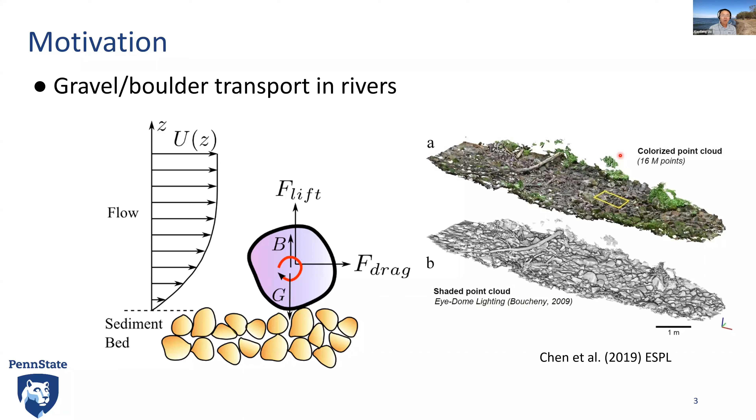In addition, when these gravel and boulders move, they interact with the bed too. If you know a little bit about sediment transport, one of the modes of sediment transport is called saltation. They just jump or hop for a short distance and go back to the bed. Because of the transport of these particles over time, the bed could change. You can have scour, erosion, so again this whole system evolves and changes status from time to time, especially during floods.

So from the perspective of engineering application, one prominent example is bridge foundation scour. If you build a bridge for roads or whatever transportation purpose, when these roads go across streams and rivers, they have to build something like a bridge to support the structure. So this foundation is built into sediment. So this foundation, or the whole bridge structure, is the object that people place into a stream, into the river.

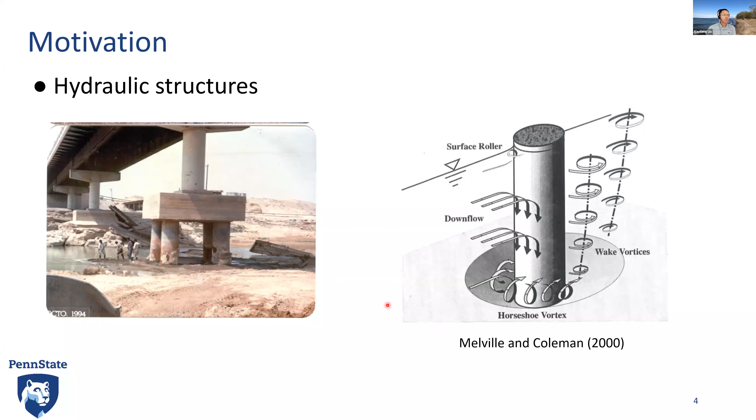So in this example, this is an extensively studied topic. People now understand what the flow field or the structure looks like when the flow comes in and meets this structure, and how the flow goes along the side of the structure. And in front of that, it can plunge down and create what we call a horseshoe vortex, which is the primary cause of sediment transport around these kinds of structures. And of course, that's the cause of bridge foundation scour.

The next example is in river restoration. This is an example where we have a project still ongoing to look at what we call large woody debris, or engineered log jams. The wood, for example these trees, this woody material, is everywhere in natural streams.

In nature. So they're part of the nature, or part of the system, right? But in the past couple of decades, people have done a lot of modifications to a lot of rivers and streams. Many years ago, we thought that the primary function of rivers and streams is to transport floods. So to make it more efficient. Well, how do you make it more efficient? Reduce the flow resistance. How do you reduce the flow resistance? Clear it up, make it clean and nice, and to make it better, just pave it with

concrete. But now we gradually realize that the river not only functions as a conduit for flood flow, but also has ecology, environmental values. For example, these are habitats for fish. So we're trying to restore many places in the United States and all over the globe. People are trying to restore the multiple functionalities of the rivers. One of the things we do here is to introduce large wood. Instead of clearing them out, now we reintroduce wood into the channels.

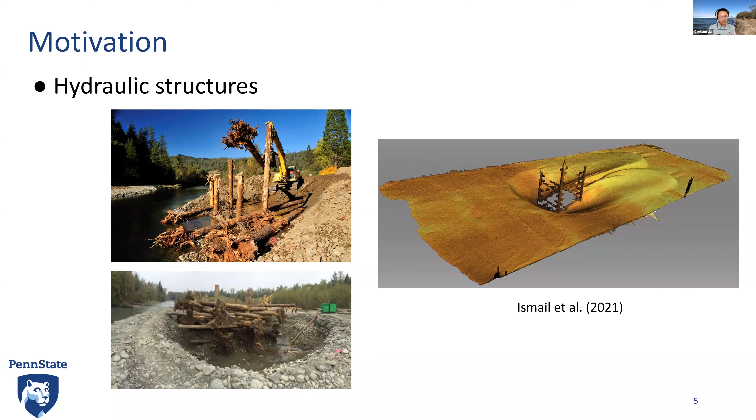But whether they can function well? For example, how are the flow dynamics going to look around these structures? How is the sediment transport going to look around these structures, and whether fish are going to like it or not? So these are open questions. Again, this is one example of a flow, structure, and sediment system.

Another example is coastal structures. In coastal areas, we have hurricanes, we have typhoons. And then we have infrastructures, we have houses, we have communities living in these areas. If you put these infrastructures there, it's definitely a flow, structure, and sediment system, because these foundations are built into the sediment. If you have a hurricane or typhoon, it might cause a lot of damage if the foundations are not designed properly.

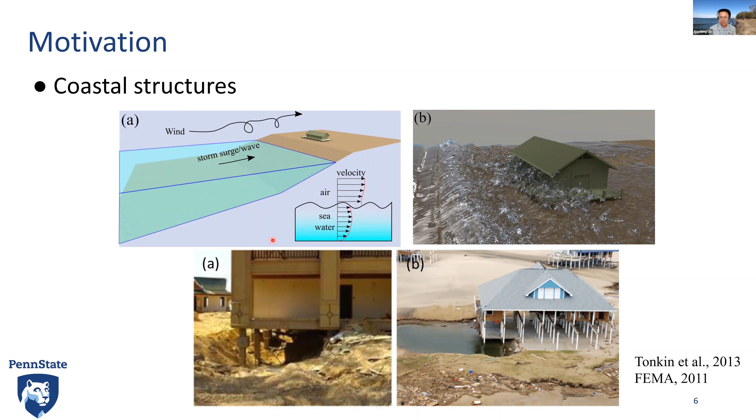As you can see on the bottom, there's some post-disaster survey. I think those are in Florida somewhere, after one of the hurricanes that happened recently. As you can see, it caused a lot of damage. So during the hurricane season, this is a big coupled system among flow, the coastal flow and waves, and the structure and the foundation sediment.

Like I said before, underwater pipelines and communication cables are pretty important for our daily life, our modern life. Scour around these pipelines and communication cables has also been studied extensively in the past several decades. But still, it's an example in this general category of flow, structure, and sediment, because these pipelines and cables are placed on top of the ocean bed. Sometimes they just place them there. Sometimes they have some kind of backfill or dig a little trench.

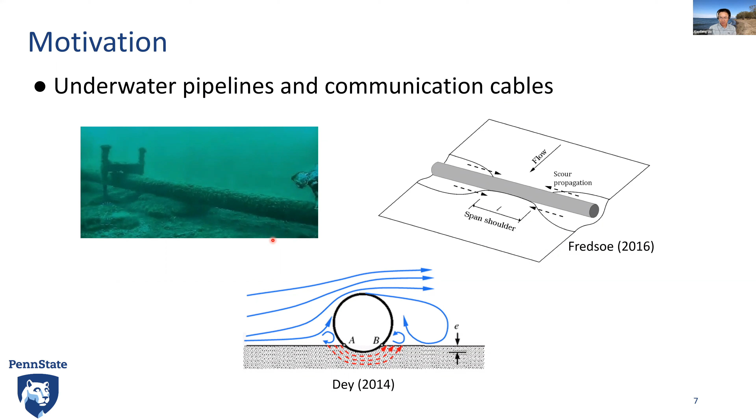But overall, it's a coupled system. We're interested in how the flow and sediment transport dynamics are going to look, whether these pipelines are going to fail or not, whether these cables are going to break or not.

So now go back to the underwater unexploded ordnance problem, which is the main purpose of the project that we're doing right now. Due to historical reasons, especially after World War I, World War II, and numerous other wars, there was a surplus of these munitions and bombs. At that time, people didn't know how to deal with them.

At that time, one obvious solution was just to dump them into the ocean. Their thinking was if you dump them far away off the shore, they will disappear. Well, believe it or not, after several decades, some of these things are being transported onto shore, as you can see in the picture on the left.

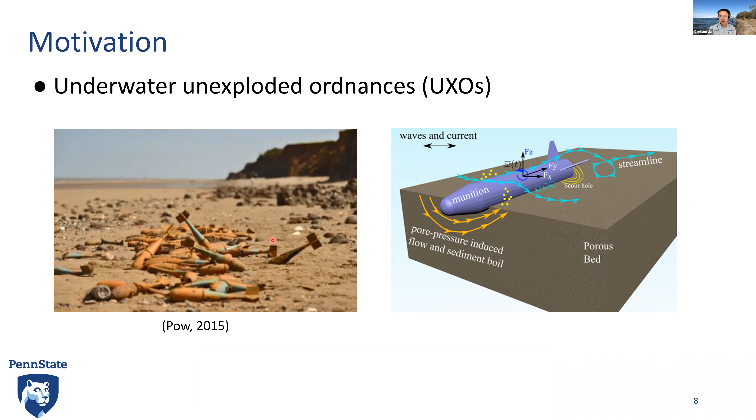So some of these things are being washed up to the shoreline, and sometimes kill people, right? And plus, it's an environmental hazard to the environmental quality. So one of the things they're interested in is the dynamics of these objects, right? As you can imagine, these objects are similar to gravels and boulders, and under the hydrodynamic forcing of waves and currents, they can be moved around, okay?

So now go back to the more general framework of these coupled systems. I want to show here a flume experiment video. This experiment was performed at the University of Illinois more than 10 years ago. What you see here is that initially there was a cylinder. It's made of steel, it's pretty heavy, placed on the bottom of sediment.

And then what you see is that they have this kind of oscillatory flow, the flow going back and forth, right? So as you see, with time, this object kind of moves and sinks down into the sediment. So we are very interested in how this is going to sink. Why does it move this way? This is only one scenario that we can simulate in the flume.

What people have observed in the field is that under certain conditions, for example a large wave or large storm event, not only can this thing sink, but sometimes it is scooped up, right? It kind of floats up and then is transported somewhere else. If you look at the whole process, it seems that this is an example of a flow, object, and sediment bed coupled system.

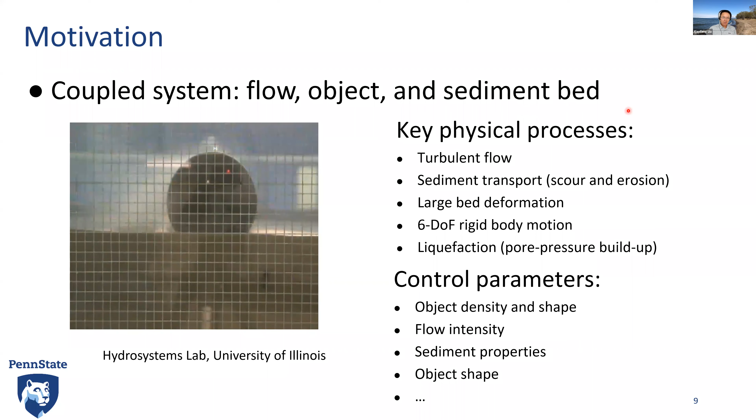And sediment property: when you have a very fine sand versus a gravel bed, the whole thing will be different. And then the object shape: if you have a cylinder or a sphere, all these things are going to be different.

So with those things in mind, how do we come up with a computer model to describe these processes? As you can see from my description, this is a very complicated process. It involves multiple phases, multiple things and multiple physics. So, if you have some familiarity with computer models, right?

Well, a computer model is nothing but a computer code that solves the governing equations, right? So what are the governing equations? The governing equations come from our understanding of the physical processes, right? So what are the physical processes? Well, I already described them a little bit in the previous slide. Mathematically, if you want to write down these physical processes, you have to write them into governing equations.

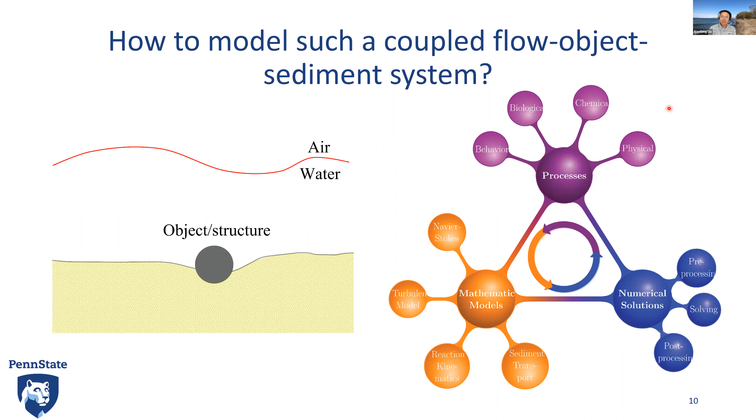Now, I'm not going to go into too much detail on the governing equations we use in these models. Essentially, it's nothing but conservation of mass, and then Newton's second law, or what we call the momentum equation, and some other physical laws, such as how much sediment is going to be moved under certain conditions, the sediment transport rate law, things of that nature. So don't be scared about these complicated computer models. Inside, what's implemented is nothing but those fundamental physical laws.

So as you can see, all these processes, more than 5, 6, or 7 physical processes, are happening at the same time. Those are the building blocks for us to come up with a more complicated model to describe these complicated phenomena. That's why I say building these computer models is like Lego. Each piece of the Lego is like one part of the model. Let's say this piece is for flow, that piece is for the sediment, and another piece is for the object itself.

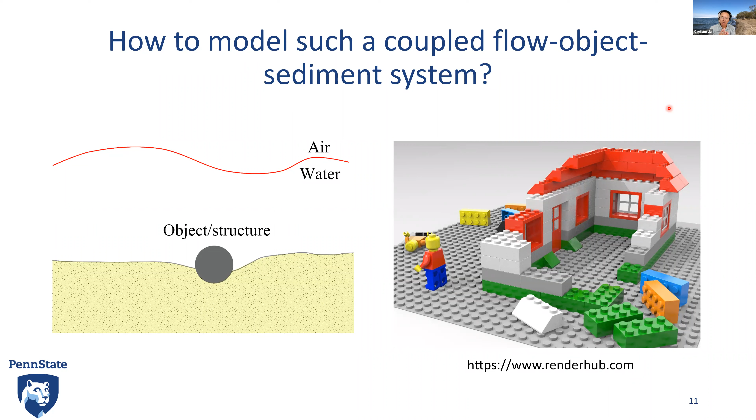Now you have to stack and put them together in the right way, so they can work together and communicate with each other as time evolves. And then this is going to make a prediction: I know what it looks like right now, what happens after 1 second, or after 1 hour, 1 week? And then you evolve the system in time.

All right. So from the perspective of building these models, there are basically two communities working on, I would say, the same thing. I'm going to show you why I say that. One is from the hydraulics perspective. I guess most of the people listening to this talk may be from the hydraulics research community. Traditionally, we only look at the river flow, the flow in channels, and then we have the sediment bed, and then we have this object here.

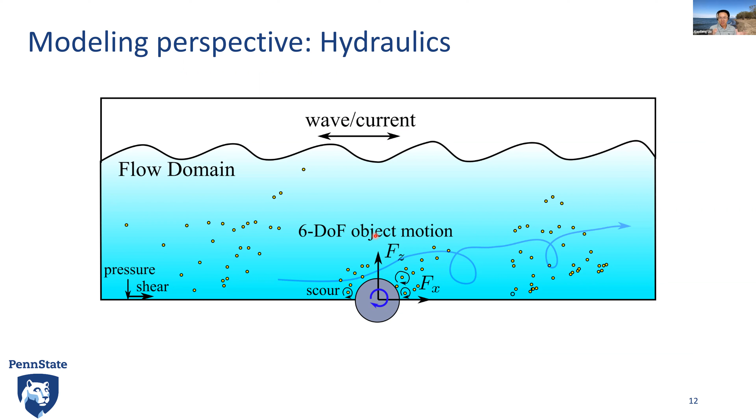From the hydraulics perspective, we don't spend too much time thinking about what happens underneath the bed surface, which is the porous media or the soil. Most of our hydraulics research focuses on coming up with a decent model to describe the flow field, the flow structures around these objects. And if I also know how to quantify the sediment transport rate as a function of the flow, then we can predict the scour erosion of this object. So this is the perspective of hydraulics.

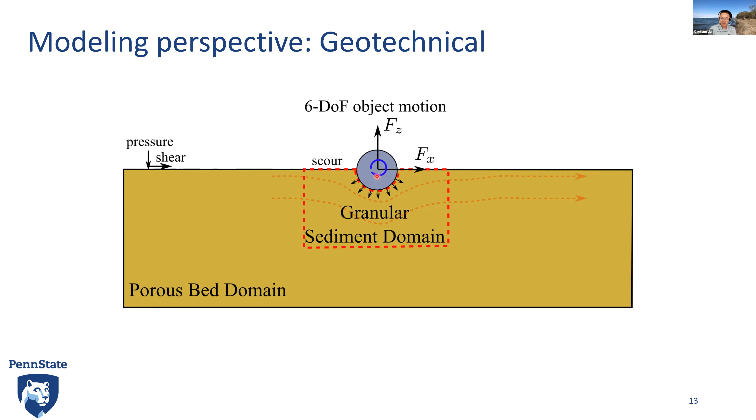As I said, there's another community heavily involved in the research of this kind of problem. This is from the geotechnical perspective. They are more interested in the behavior of the soils. We call it sediment, they call it soil, but essentially it's the same thing. They are interested in, if I build a foundation or put something on top of the soil, how is the soil going to behave? You're going to have some kind of settlement, or some kind of failure. So they are interested in things like foundation design, the stability of a slope, things like that.

But really, we should combine these two perspectives together to have a holistic view of what's going on. If you only look at what happens above the bed and miss the information underneath the bed, I think we are missing a big part of the dynamics. And from the other side, in the geotechnical group, people are more interested in how the granular material is going to behave, how the soil is going to deform.

If they don't understand what happens in the channel, like the flow around these objects and above the bed, and the pressure acting on top of the bed, so they have what we call the pumping effect in and out of the bed, they also miss a lot of physics.

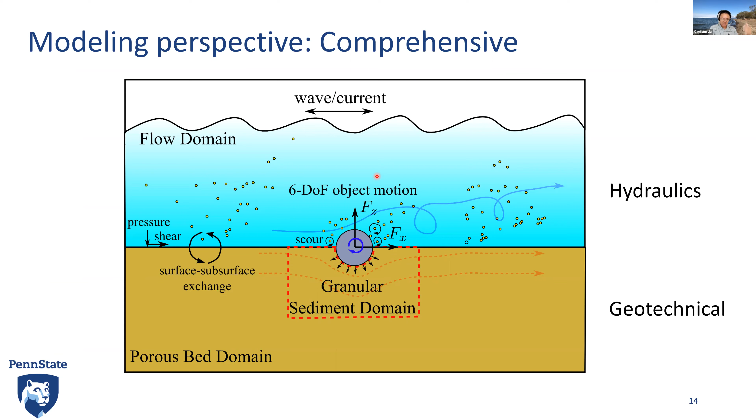So we should combine these two perspectives together to come up with a holistic view, so we can have a better understanding of the physics in this coupled system of the flow, the sediment, and the object in between. So what we did in my group is we are going in that direction. We're not there yet, but we're going that direction.

So what I'm going to present to you quickly here is some of the models we developed for each of these components, and hopefully we can have some kind of coupling between different components inside this coupled system. So the first one is the traditional hydraulics perspective. We look at the flow domain first. So we solve the wave and current in this channel, in this coastal area,

by solving the governing equations. The governing equation again is nothing but the conservation of mass for fluid and conservation of momentum for a fluid. Newton's second law, nothing more than that. In addition, of course, you have to have some kind of a way to describe the turbulence.

Now, in my group, we use the open source platform OpenFOAM a lot. We have been using that for a long time, so we have experience developing our own models using this open source platform. And OpenFOAM, if you know about that, is open source code. It uses the finite volume method.

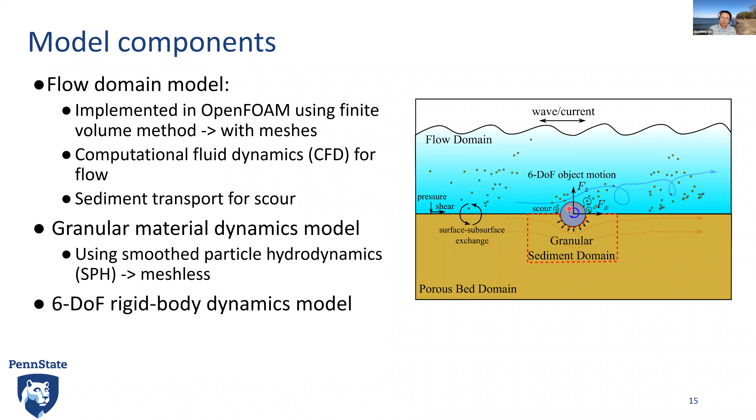In this part, we use another approach, which is called smoothed particle hydrodynamics, SPH. Now this is in contrast. This is a meshless method. It only uses particles to discretize and solve the governing equations. And of course for the object itself, we use a 6 degree of freedom rigid body dynamics model to describe the translation and rotation of this object.

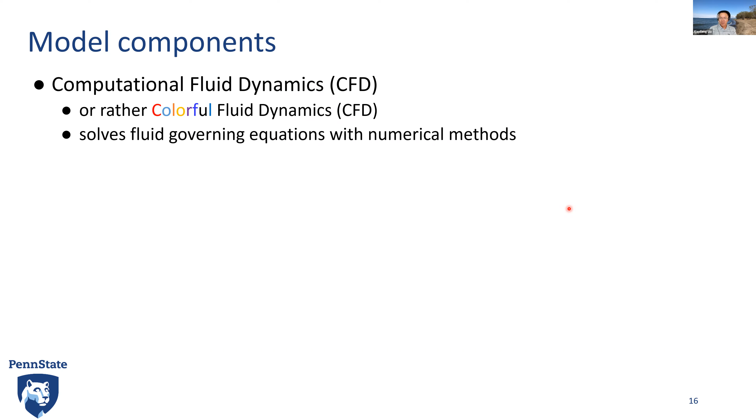So I'm gonna go through each of these components and tell you briefly what they are, and then I'm gonna show you some example applications. So CFD, computational fluid dynamics. Sometimes people call it colorful fluid dynamics, because most CFD results are shown in colorful pictures and animations. Essentially, like I said before, there's nothing fancy.

It just uses some kind of method to solve the governing equations. These governing equations are usually in the form of differential equations, and these differential equations are nothing but our mathematical description of the physical laws. And I'm not going to go into the details of how we discretize these governing equations and how you generate the mesh.

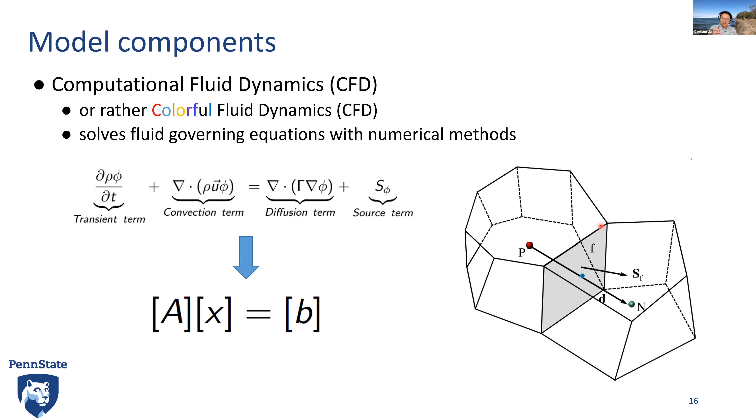Eventually, what do you have? What these CFD packages give you, after solving the problem, is the solution at, for example, the center of each of the control volumes, or cells, you have in your domain. The cells are part of this mesh that you have to create for your simulation domain.

Okay, so like I said, for the flow domain part, we're using CFD and sediment transport. For hydrodynamics, the governing equations have a special name, and then you add the turbulence modeling into that. And for the morphodynamics, we calculate the sediment transport rate. Sediment transport typically can be classified into two modes. One is suspended load, the other is bed load.

And then when you have the transport rate for each of the transport modes, you can use the conservation of mass for the sediment in the bed, which we call the Exner equation. If you solve that, it's going to give you the updated elevation of the bed at every time, and then you can march in time to see the evolution of the bed. So nothing fancier than that.

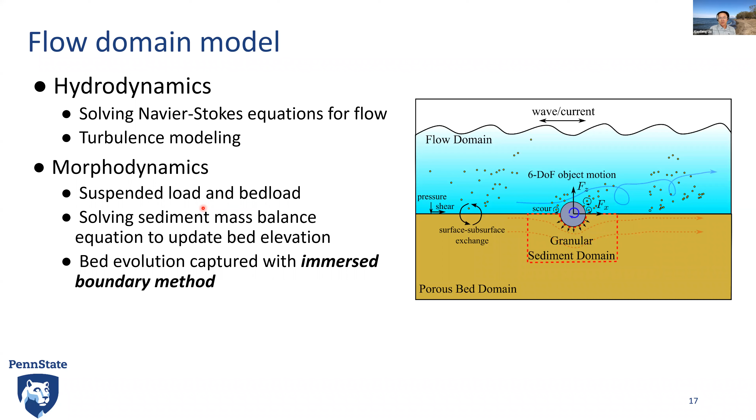But one particular thing I want to point out is that over the years, we adopted a method called the immersed boundary method. So I'm going to show you what that is. Traditionally, or many years ago, me included, we used a method called the mesh deformation method. So the idea is the following.

Initially I have the bed. If you look at my cursor, initially I have the bed here, and with time, the bed gets eroded into a new position. The mesh deformation method says, well, if the bed moves, these grid points are going to move accordingly. Now, this method is very simple. Basically, you're deforming or stretching the mesh points.

But the limitation of this is that it can only deal with very simple geometry, like a vertical cylinder. If you read the papers and literature, many publications in this area can simulate the scour, but if you look at the application example, it's scour around a vertical cylinder. One of the reasons they can only do this is the limitation of the mesh deformation method.

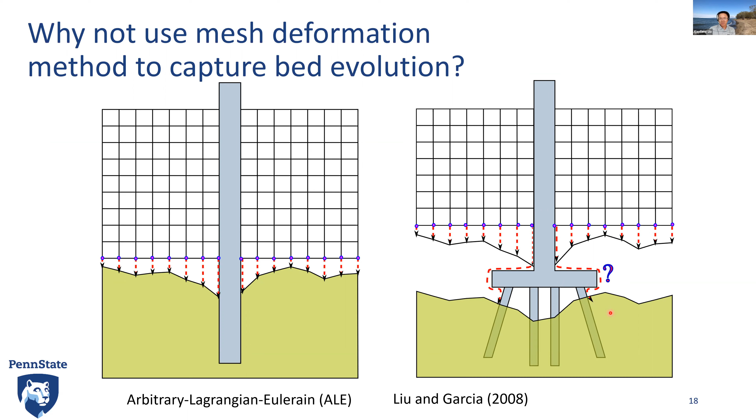For example, they cannot simulate a very simple bridge pier. So we have a bridge pier with a cap and a group of sub piers, piles. How do you do that? It's very difficult to do with mesh deformation. So to give you an example of that.

This is an example showing what's going to happen if you use mesh deformation. You have a vertical pile, and then you have sediment transport around this pile due to the current erosion. If you look inside the scour hole, as you can see, deep in the scour hole the mesh is being stretched.

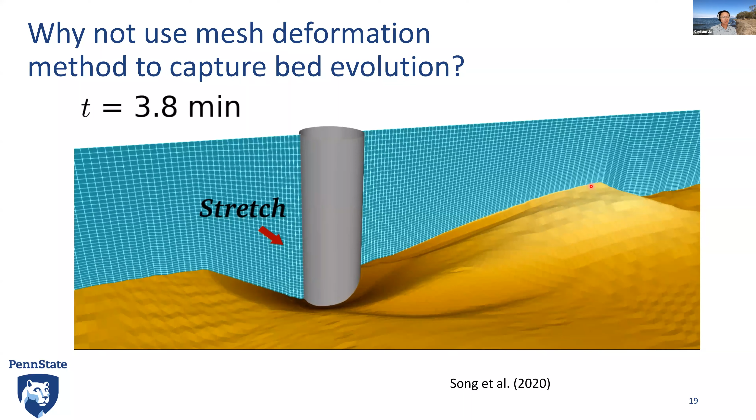But in the deposition part downstream, the mesh is being squeezed. As you can imagine, if your scour hole is very big and the deposition pile is very tall, it could make the mesh quality deteriorate or even make the simulation diverge. Okay, so that's the reason we use a different approach, called the immersed boundary method.

In this immersed boundary method, the background mesh itself does not change. What's changing is the interface, for example, here noted as the blue line. This interface is free to move around. Let's say this is the wall, the sediment bed; it moves around with time. Its effect on the flow is treated using this immersed boundary method.

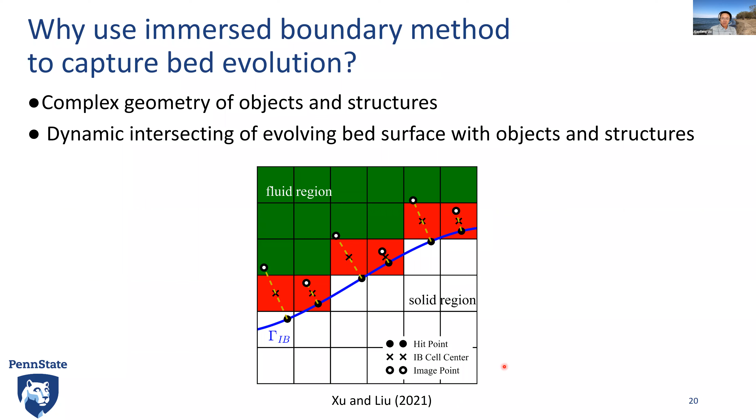I'm not going to tell you the details about what the immersed boundary method is and how we do that. In fact, we have a paper on this. We improved the immersed boundary method, which we didn't invent. It was invented by people in biofluids to simulate things like the heart pump effect. So if you're interested, you can have a look at this paper.

Next, I'm going to show you some examples using the immersed boundary method that we developed and improved. One of the important improvements of our immersed boundary method is to produce a smooth wall shear stress, because wall shear stress is the driving force for sediment transport. If you don't have a smooth wall shear stress, the sediment transport is going to be all messed up, and the result is not going to be good.

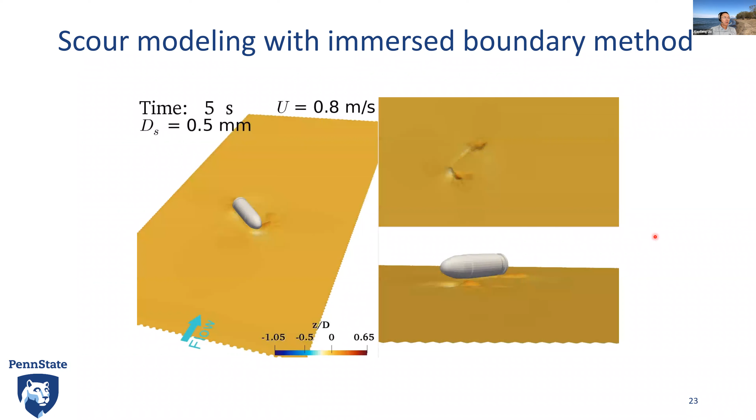So another example I'm showing here is that the incoming velocity, remember, is 0.8 meter per second. Now, as you can see, initially the bed is flat, and then there's kind of a sediment wave coming in from the inlet, right? You can think of this as some kind of a bed form coming.

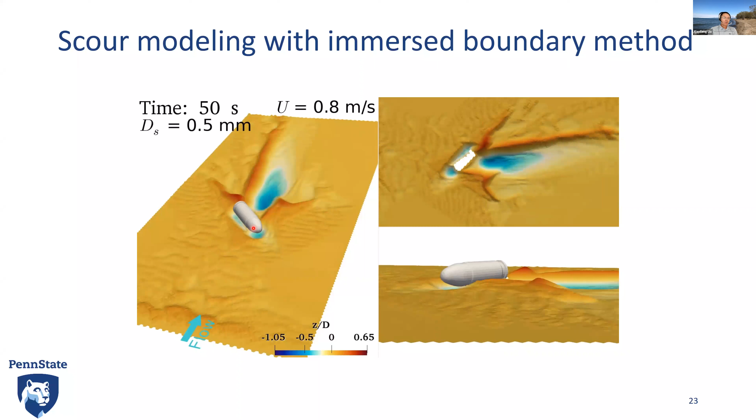Now, when the bed form comes and meets the object, it seems that our model can simulate the burial of these objects under the peak of this bed form, right? And you can imagine if you want to use the traditional mesh deformation method I showed in previous slides, it's going to be very, very difficult to do, right?

So now all these examples, right? They look fancy. Looks about right. But in order to really calibrate and validate our model, to gain more confidence in the result, what we did is we compare our result with some flume experiment we performed in our lab. So what we did is we segregate part of the physical processes out of the problem.

So what we did is we put these objects. We have actually two objects. One is the cylinder, kind of a short cylinder. The other is the real ammunition. We put these two objects onto a cradle, so it's fixed. It does not move, right? Otherwise, it's going to be too complicated for this model to really capture everything.

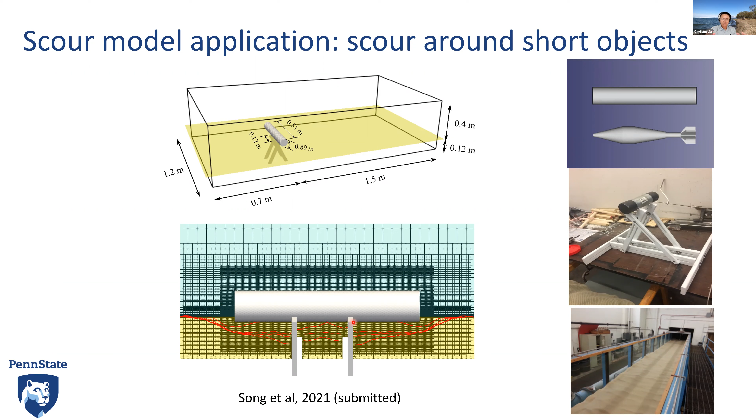From the side, you can see here, and these red lines are the measured scour profile along the center of the slice. As you can see, with time, the scour erosion kind of propagates underneath, because this thing is fixed on this cradle. I think I can show you the animation here. Hold on, let me change the pointer.

So initially, the scour erosion happens at the two ends of this cylinder. And then the scour holes on both ends kind of expand. Eventually, they meet in the middle, and then the sediment underneath is dug out. It forms a big hole under this object, as you can see here. And then the sediment excavated underneath this cylinder is deposited downstream. And this matches well with what we saw in the experiment.

So we also did the same thing for this ammunition object, as you can see here. Now the general trend of the scour erosion with time looks similar. The scour erosion starts at two ends of the ammunition. However, the progression of this erosion, or evolution of this scour hole, is kind of different than the cylinder case.

As you can see here, the shape of this real munition has a kind of a tail, right? And then a very thin or very small section, and then you have this head section which is larger in comparison to this uniform size of cylinder. So the hydrodynamics, the flow structure and sediment transport scenario are different, right? So you cannot exactly reproduce the process using a simplified cylinder. So that's one thing we find out.

So that's the part for the flow itself. For the flow domain, where we have the turbulent flow field, we have sediment transport. All this is the traditional way to model the flow domain part. But what about the granular material part? Now, in this case, the granular material part, we have two phases. One is water, which is liquid, and then we have sediment. The sediment is saturated, so it's a saturated sediment. There are interactions between these two phases, as you can imagine, because of porous media flow.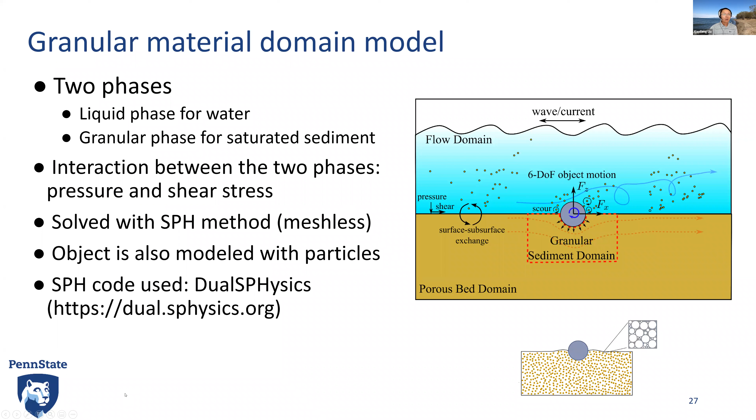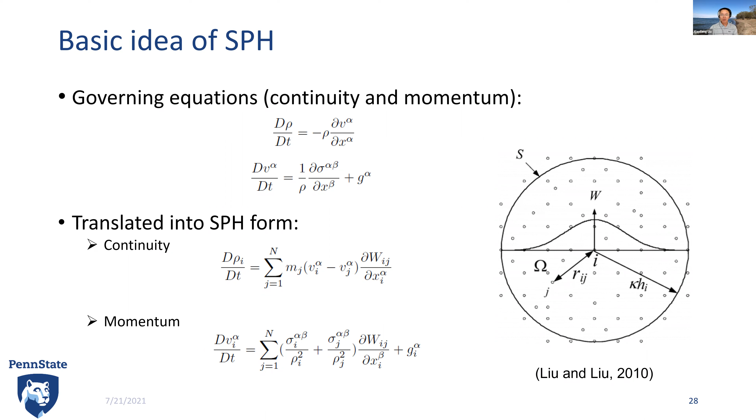So this work is done using the SPH code called DualSPHysics. It's open source. So the basic idea, again, I'm not going to go into the details of these methods. The basic idea is you discretize your equations using particles instead of cells. And then each particle has to obey things like conservation of mass and the momentum equation. That governs how each of these particles move, and collectively they describe the behavior of the saturated sediment.

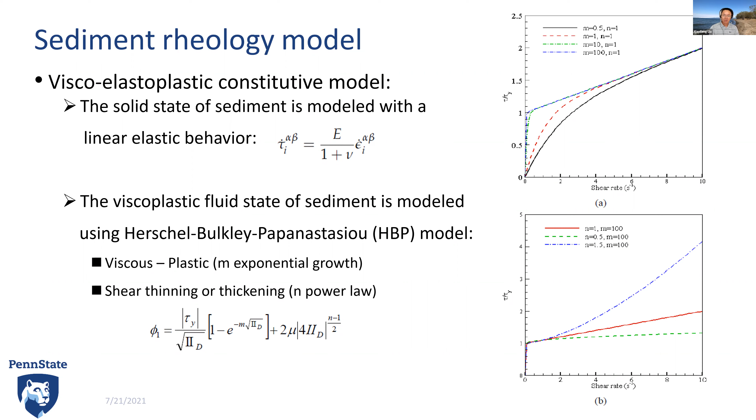And this saturated sediment is not a Newtonian fluid. The difference between Newtonian and non-Newtonian: water is Newtonian, and the shear rate and the shear stress are linearly proportional. But for saturated sediment, they're not linearly proportional. So people have come up with different rheology models for saturated sediment. We use one of the popular models that people have proposed. Again, I'm not going to go into the details of these models, but you know that saturated sediment is not Newtonian.

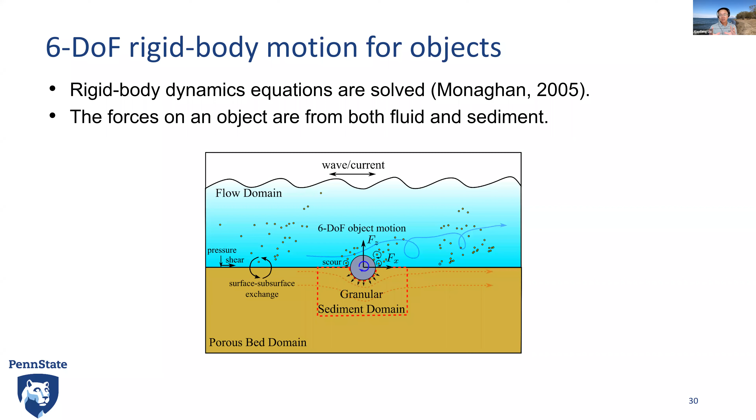Now, to put everything together, you have two phases: water and sediment. What about the object, or if you have a structure? Well, if this object can be moved, we have to simulate the rigid body dynamics. So how do you solve the rigid body dynamics? Essentially you have to give the information on the force and turning moment on this object, force in XYZ direction and the turning moment in XYZ direction too. And then you solve 6 governing equations to solve the velocity in XYZ and the angular velocity in XYZ. With these 6 variables, you can update the position and orientation of this object. So that's it, nothing fancy here.

So I'm going to show you some examples. One is if I have oscillatory flow. Remember the animation I showed at the beginning. So I have a box here. So let me make it laser pointer.

So I have a box of sediment. Initially, I have this object that I placed on the top of the sediment, and on the top I have the fluid going back and forth. I have prescribed some kind of a driving force for the flow to go back and forth.

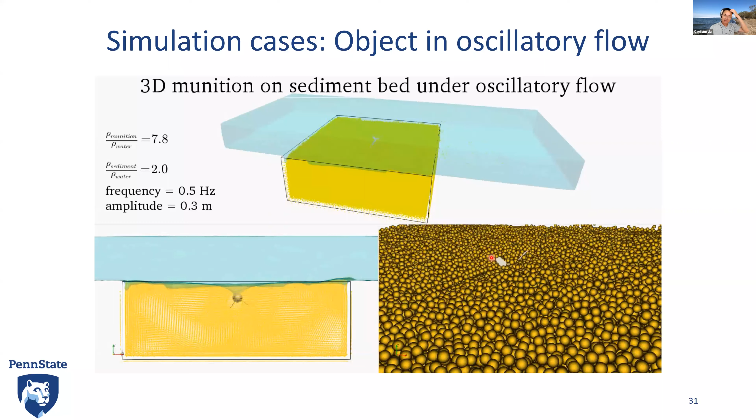So the animation shows that, as you can see, this object moves around, carried around by the oscillatory flow, and also it interacted with the sediment. And with time, the majority part of this object is being buried into the sediment particles. So this is an example showing you that this model considers the dynamics, the coupling among the fluid flow, the object, and the sediment dynamics.

So what I have here is a demonstration by a collaborator at the Naval Research Lab. Initially, it is a box with sediment on the bottom, and you have water on top. And then he placed a sphere, actually, I think two spheres. One is this black sphere, as you can see here, right at the bed. And if you look carefully, there's also a ping pong ball type plastic sphere buried inside the bed. So now what he did is to shake the box.

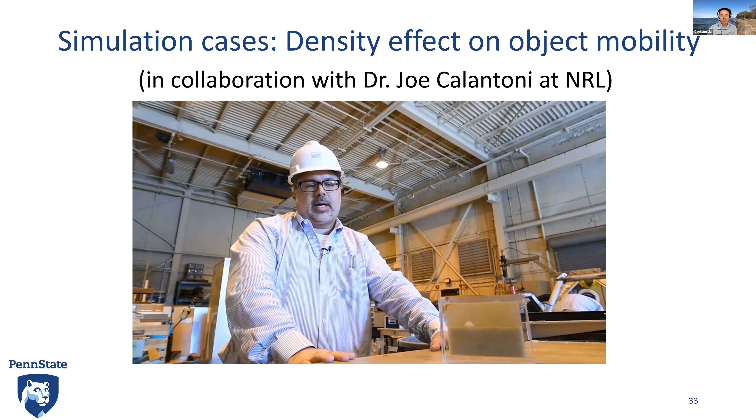So with time you'll see that if he shakes it, using this kind of cyclic motion, something like a wave, the heavier black ball sinks down into the sediment. And if you shake it even harder, the light ball kind of shows up. It floats up vertically into the water. So this is a very simple setup, but it has a lot of interesting things happening here. It demonstrates the importance of the density.

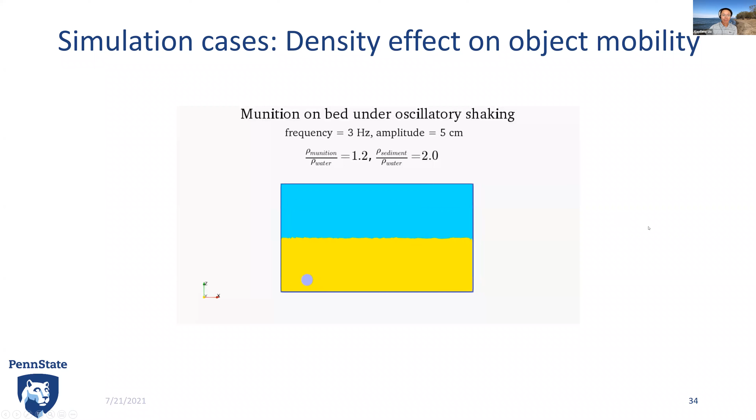So in our model, you can easily change the density of objects. So what I have here is a box, like you saw in the video in the previous slide. I shake it. But here, initially, this ping pong ball is buried in sediment, and it has a specific gravity of 1.2. Slightly heavier than water, but lighter than sediment. So if you shake it, this object is floating up.

Because of the interactions and because of the density, it does not sink. Now, what if I increase the density even more, to make its specific gravity 7.8? So this is like steel. Now this object is much denser than water, even denser than the sediment.

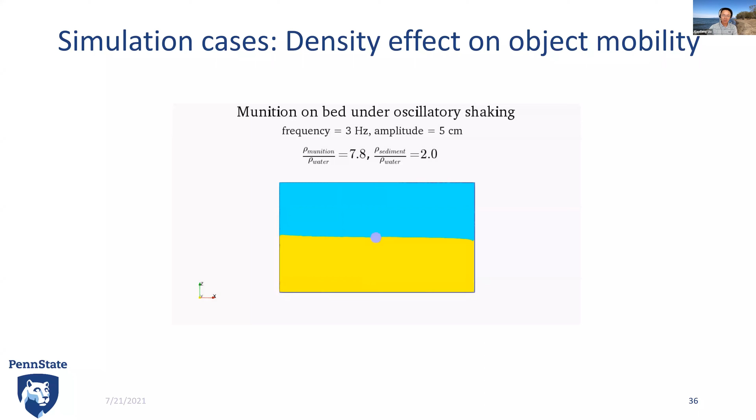So what happens is that initially it's placed on the top. If you shake it, with time it's going to sink down into the sediment, because the sediment doesn't have enough capacity to support it. So it kind of flows down.

The last example I want to show before I conclude is work with the University of Delaware, our collaborator there, Professor Jack Puleo. In their wave flume, they have a setup of a dam break wave coming, and they have a sediment beach. So let me see here. They have a sediment beach, if you see my cursor.

What they did is they put a sphere or object on the surface of the beach, and then lift the gate. The dam break wave is going to come in, hit the beach slope, and then hit the object. They used a high-speed camera to look at the dynamics of the process, and we simulate the same thing with the same setup using our model.

The good thing about a computer model is that you can get way more information than in the experiment. So here, when you lift the gate, the water collapses, creates a wave and comes in along the surface of the slope, and when the water hits the object, it starts to move it, accelerates it and pushes it toward the end of the flume. Let me run this again, and hopefully you can see this animation and get the idea.

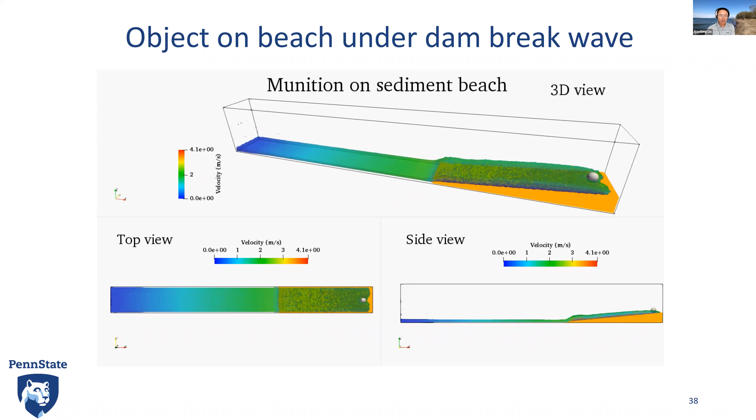Once it is dislodged, it's much easier to move. If you go further, at this moment it starts to move, gains momentum, speeds up and is slammed into the end wall. Like I said, with a computer model you can get more information. One piece of information which is almost impossible to measure in experiment is the force acting on this object.

Let's say in rivers and channels you have gravels. If you're interested in the transport of gravel and boulders, you're probably going to look at the forces acting on this gravel. Same thing here: if you want to look at the dynamics of this object's motion, you need to know the forces in X, Y, Z directions as a function of time. In experiment it's practically impossible to measure, but with a computer model you can extract that information.

What I'm plotting here is the force in X, Y, and Z directions as a function of time, and you can look at different time snapshots. At the beginning everything's in equilibrium. The only force the object experiences is gravity. In X, the streamwise direction, and Y, the span-wise direction, all the forces are zero. Only in the vertical Z direction do you have gravity. The interesting part happens at initial contact, as you can see here.

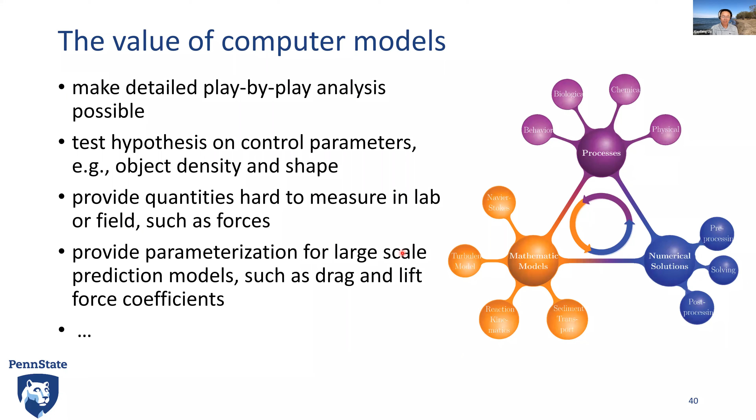Now, all these cases I'm showing here are small scale, in the flume. There's currently no way for the detailed model that I showed today to be applied to a domain tens of miles or kilometers long. But the value of our small scale model is that we can extract some information, some of the coefficients, which can be plugged into large scale models for real world applications.

So to summarize, hopefully these examples give you an idea that many of the things we're dealing with in rivers and in coastal areas can be generalized as a flow, object or structure, sediment system. This is a very fundamental system and has a lot of applications. And the second message is that we need to have a holistic view of the system in order to advance this field. We should think out of the box of a hydraulic engineer's or a geotechnical engineer's perspective. We have to combine both together, and computer models are very useful for examining and for prediction.

So with that, I want to conclude here, and see if there are any questions. I will be glad to answer those.

Xiaofeng, thank you so much. I appreciate your presentation, I really enjoyed it. Oh, thank you. I see that you went on to many applications after I initially saw your work, and I really love it. I remember your deformation model, now the immersed boundary method. I have seen your work on that, but the range of applications you are showing, I think it's fantastic. I have my own questions, but there are some questions from the audience, and I'm going to pick some from Zoom and from Facebook.

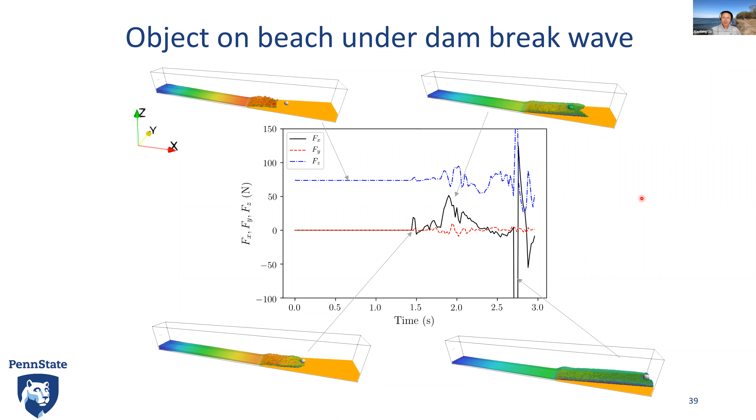Great. Yeah, that was quite clear. I think Efraín was also asking on that. Thanks, Xiaofeng. I do have a question from myself. You have modeled different shapes of objects, very complicated shapes, and also the last one on the beach, where you have this sphere, and you were showing the forces around the sphere, and that it takes some time to get mobilized. That's very interesting. Because maybe you are doing some flume experiments, have you tried to install devices inside of the objects to measure the real forces on the object?

Yes. So they do. As you know, I'm not an experimentalist, so that's why we need to work with experimentalists. Our collaborators have developed very sophisticated instrumentation on board. I think they call it IMU, an inertial measurement unit or something like that. Those things you can buy off the shelf, some kind of little battery, and then you have instruments like an accelerometer, pressure sensors. So they can record the acceleration and the rotation of these objects, and from that they can back calculate the total force on that object.

So yeah, this is very valuable information for us to calibrate our model. But yes, to answer your question, they do have a lot of that. I think Marcelo also, like Blake, when Blake was in Illinois, they developed something similar too.

Yeah, okay. No pressure, but Marcelo Garcia is in the audience here today. So. Yeah. No pressure. No pressure, okay.

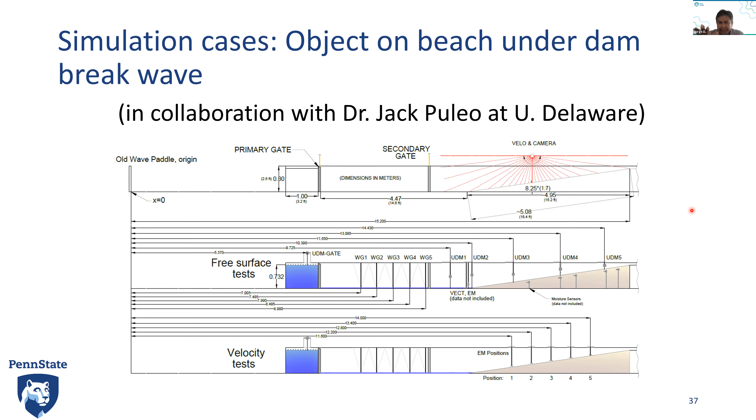Thank you, Xiaofeng. And this will be the last question. You showed some experiments in a straight channel where you did a comparison with measurements and modeling of the bed elevation, and you were discussing that you captured the pattern, not exactly the bed surface. I was wondering, were those experiments clear water experiments, or did you have recirculated sediments in the experiments? And how did you account for the boundary conditions in the modeling portion?

So in this case, we specifically designed the experiment to be clear water scour, meaning that sediment only moves in the surrounding areas of the object because of flow contraction. In other areas away from the object, sediment does not move. For those of you not familiar with scour, basically we have clear water and live bed. Clear water scour typically has a larger scour depth than live bed, not always the case. So that's why we designed the flow conditions such that it's clear water scour, so we don't need to worry about the sediment incoming and outgoing.

We would like to expand our experiment to include some kind of live bed, and our model definitely can handle that, because you just specify the incoming sediment transport rate and outgoing, right? And then you can even make a loop to recirculate that too.